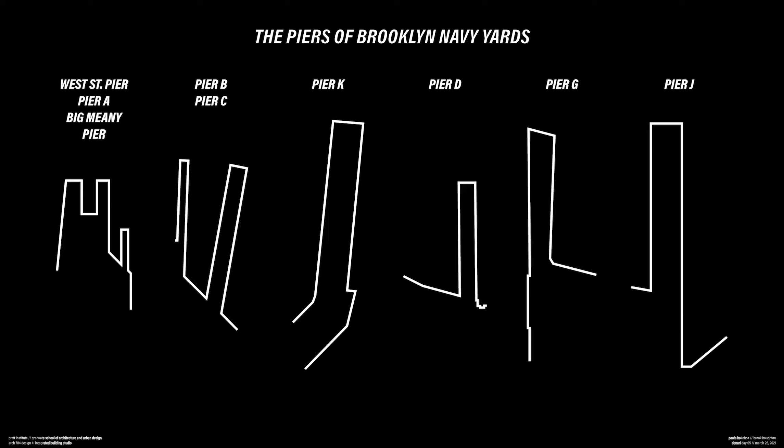We found our site at the edge of the Brooklyn Navy Yards in a state of disuse and neglect, yet a sense of calm, nature, and serenity was deeply imbued in the site. Wildlife is abundant, the channel invites people to explore the water's edge, and the sounds of the city are distant.

Our project investigates spirituality found through these spaces, and ideas of destruction and regeneration. It adapts its architecture to meet the natural habitat of the site. To achieve these concepts, we turn to sea caves as a source of inspiration, as they are formally complex, yet are easily understandable and invoke a deep sense of peace and spirituality.

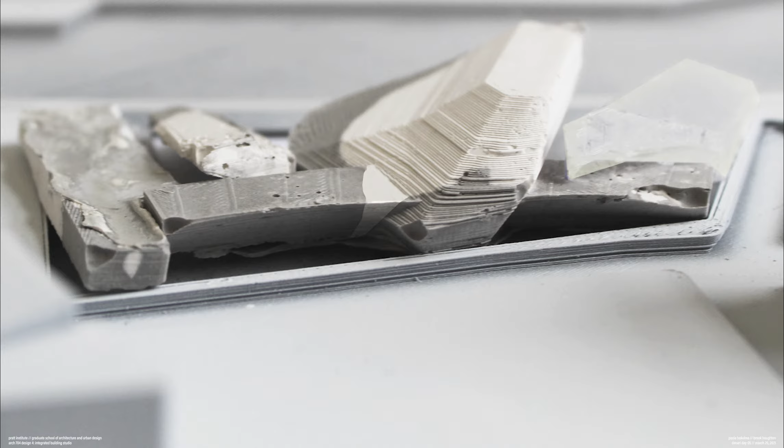In order for us to establish an appropriate massing scale, we explored through material and physical studies, incorporating colors and various mediums as a main tool into the massing's differentiation. It helped break down the overall massing into distinct yet unified masses. Furthermore, the physical models show the initial development of the geological formation and the edifice's relationship with the water.

Through our physical model, we explored the idea of fracturing through the use of different materials and colors. We then recontextualized these fragmentations back into an architectural language.

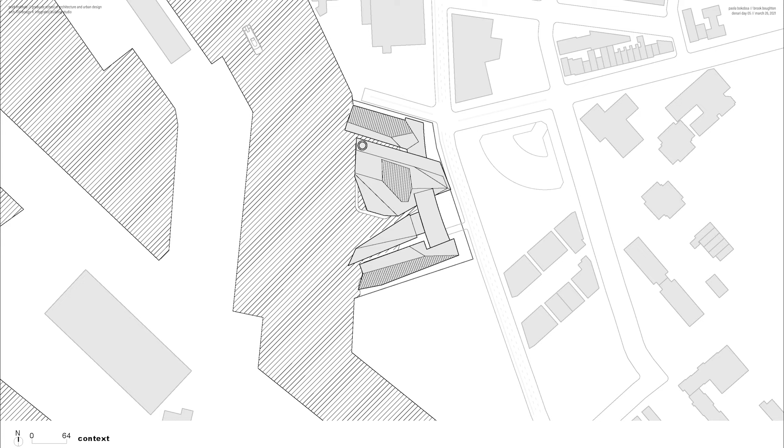After closely studying the evolution of the Brooklyn Navy Yards, the project aims to re-envision the language of the piers and dry docks in order to inform the relationship between the water and our site conditions. By allowing the water's edge to break into our site, various underlying natural habitats appear.

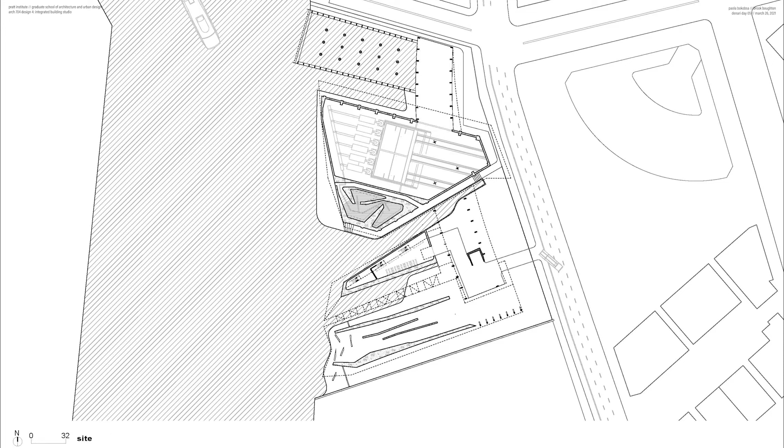In the south, we have a sea cave-like experience where individuals can come to reflect. In the middle of our site, a grotto runs along the edge of the waste-to-energy plant, allowing for an intimate experience along the water's edge. And in the north, a cavernous opening envelopes and welcomes ferry passengers to our site.

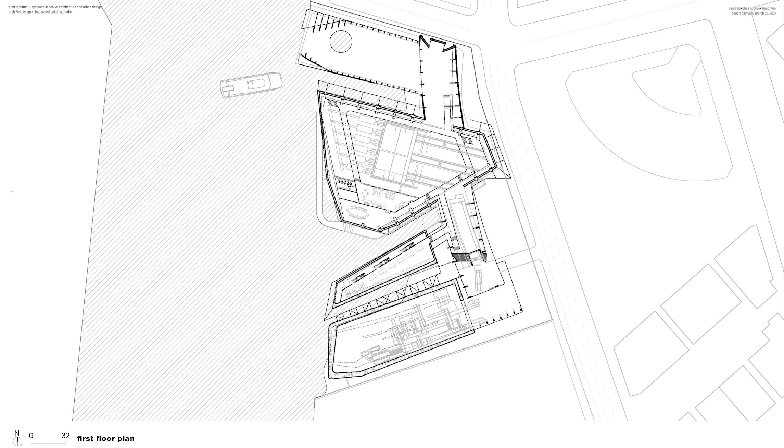The landscaping along the street edge, still under development, will reinforce the language already established, while introducing a softer landscaping by integrating berms, pathways, and other elements in order to enliven the street's edge and invite passersby into our site.

We found the program of waste-to-energy can essentially be recontextualized in a spiritual way as destruction and regeneration. Furthermore, that notion is emphasized by introducing a mushroom farm and mycelium panel factory, which follows that same natural concept. Fungi functions at its core as nature's waste-to-energy plant.

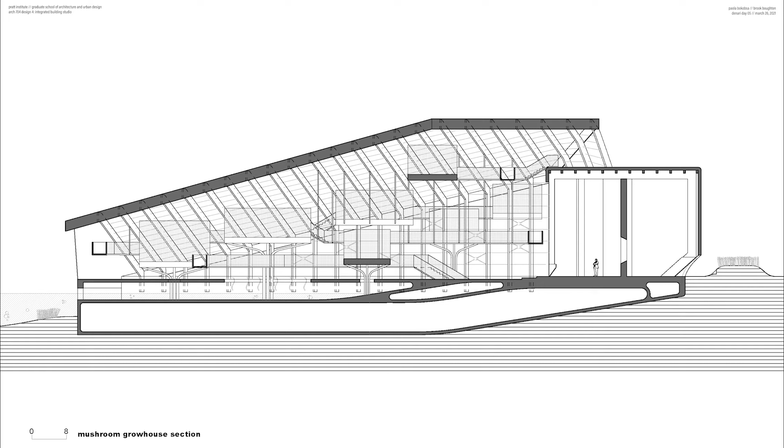The fungus grow house will use compost in order to grow its fungi, and once the fungus grows to an industrial scale, it will be transferred over to the mycelium panel factory in order to be turned into panels that will be used on and off site.

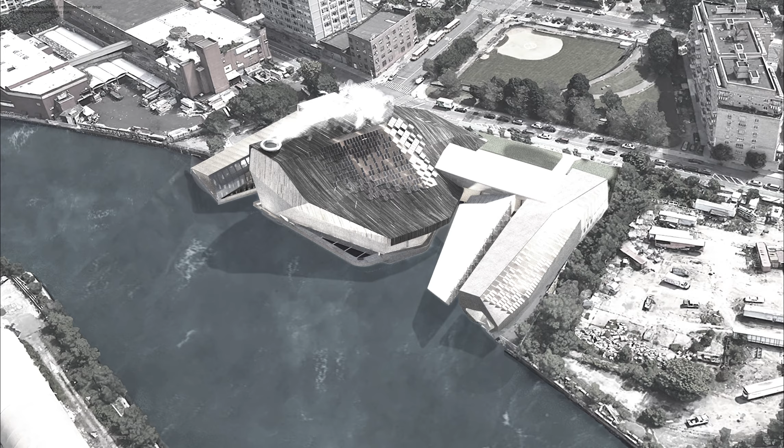The design of the structure started with the conceptualization of the building's structural systems. These systems transition between one mass to another and symbolize the link between the fragmentation in materiality and massing. Each system is adapted to the geometry and specific material of each mass, all connected to a singular massing, acting as a connector, shaping a unique circulatory system.

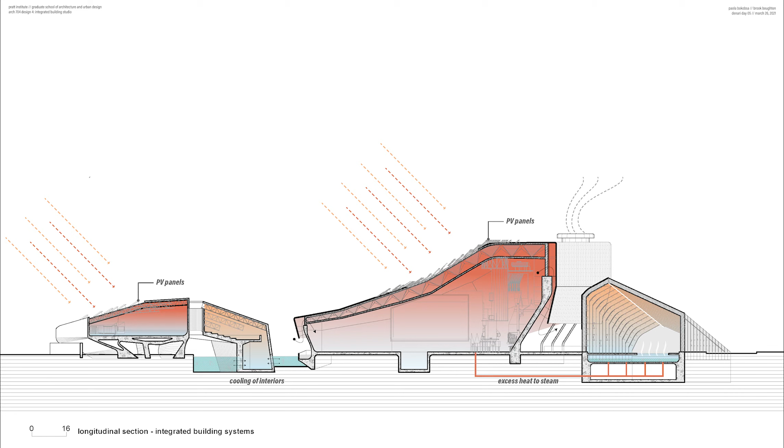The positioning of the massings were reinforced by environmental factors. Strategies such as photovoltaics, heat to steam, and natural cooling systems were all implemented into our building's core design and help unify the environmental strategy.

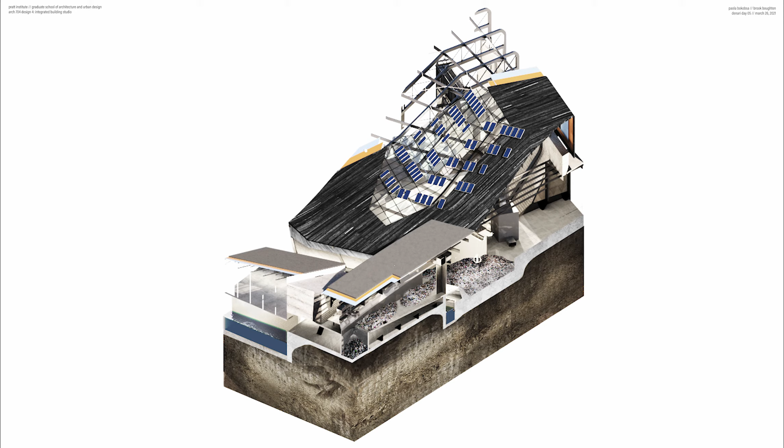Wood, mycelium, and a diffuse glass are our main three materials. Wood was an obvious choice as our neighboring site is a lumber manufacturing facility. We are producing the mycelium on site as well and will be able to adapt the building's needs as necessary with both these materials. Finally, the channel glass allows for a better understanding of the spatial organization and activity by allowing these spaces to glow at night.

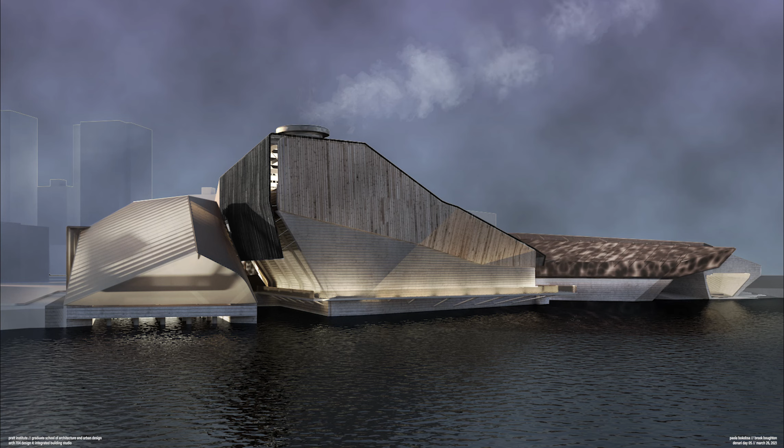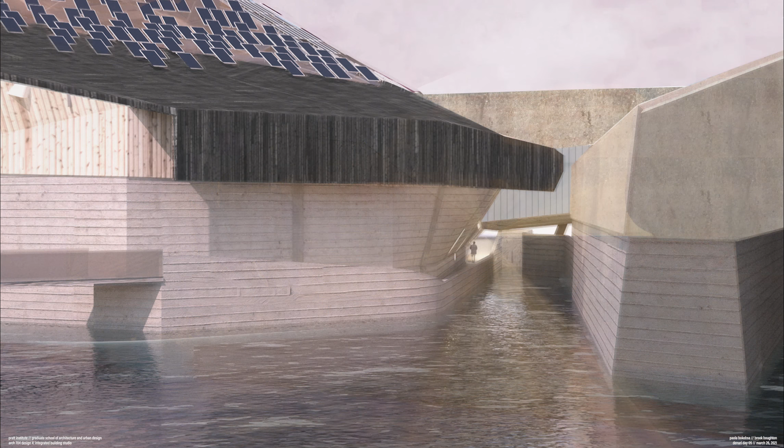By using the program's destructive and regenerative qualities, the project investigates the different conditions of an architectural space within its natural habitat. In other words, the edifice instrumentalizes the intangible lighting and material qualities of the sea cave, acting as transitory spaces between one functional programmatic space and another.

Public energy infrastructure cohabits with an open space that welcomes people into these new experiences between the ground and the water.